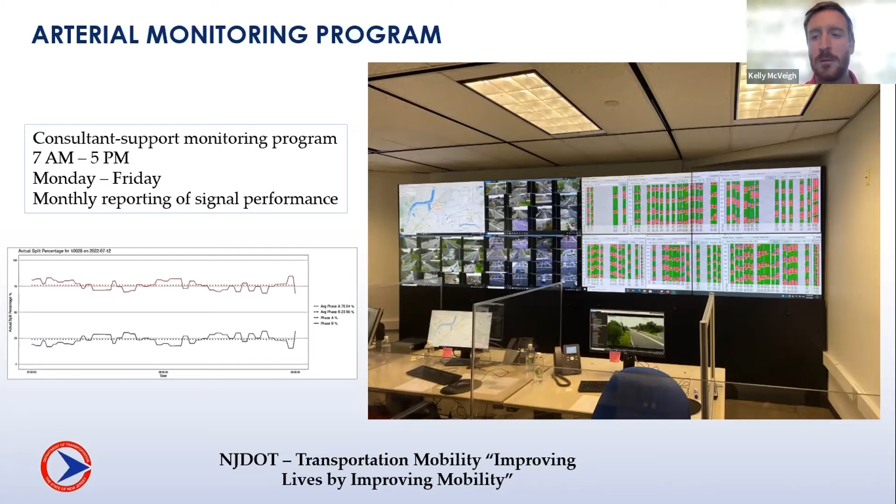So just to give you an idea from a network standpoint, what's the size of our network here? So in New Jersey, there's several corridors that have recently been constructed and are in full operation. We're constructing currently, I think it's 73 signals in construction, and then we've got 118 signals that are in final design. So we are expanding, as I mentioned before, our advanced traffic signal network.

And just to give us some context here, why are we doing this? Well, in New Jersey, traffic fluctuates quite a bit. So having advanced traffic systems, especially adaptive traffic signal systems, plays a key role there. But even more importantly, there's some specific policies and procedures that we have to follow in the state of New Jersey when determining how to update a traffic signal timing, and what kind of data collection, what kind of effort has to go into actually updating timing parameters. And having an adaptive system makes that process much simpler. So we're able to respond to issues much faster.

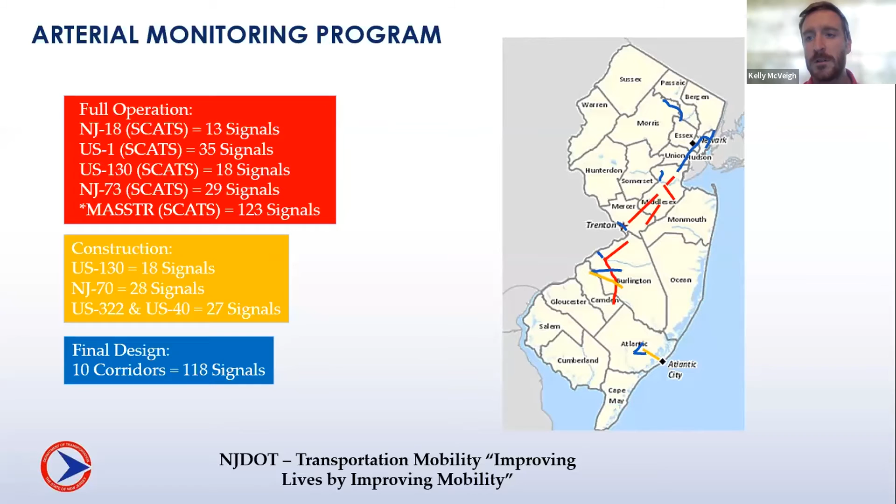So on to some of the data that we use in terms of crowdsourcing data. There's two user interface platforms that I'm going to go over. The first one that we primarily use is something called the SPATEL Tool.

I believe it stands for, if I can remember, Selected Priorities Applied To Evaluated Links. It's something that's developed by the Transcom Coalition for the New Jersey, New York, and Connecticut tri-state area.

So we will use that in terms of real-time monitoring. There's a map interface, much like if you were to log into Google Maps or any other mapping application, and you can see things such as the current speeds. It also provides information like the historical speed, so we can get a good idea of whether this is something normal, or something we need to look at with our cameras or additional data from the traffic signal system. Is our traffic signal suddenly trying to increase its cycle length out of the norm, and why? Oh, there's a lot of congestion here that is not historically there. So it's a useful tool.

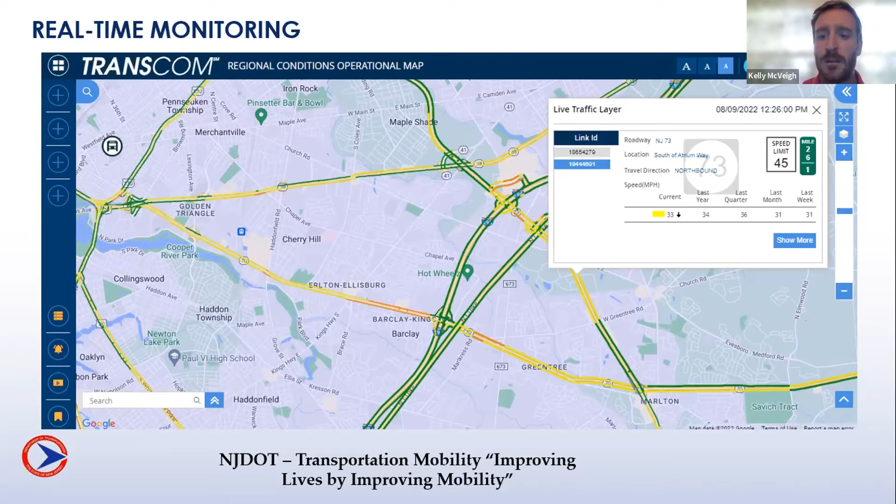It also is interesting because it provides some information on the data source, and I'll get to that in a slide. Here's just another example of the same type of data. It's a dashboard that we'll have, generally on one of the computers in the Arterial Management Center, for our corridors.

This is an example of one of our corridors, Route 18, specifically in the northbound direction. So if there's a priority direction we want to focus on, we can easily set that up. Setting up a dashboard like this, once the data is in the Transcom SPATEL Tool, takes about a minute or so. You just have to select the links you want, maybe 5 minutes if you're looking for the links.

And again, it provides a lot of good quantitative data here. What's the current travel time? Historically, what is it? It gives you the delta—that's what you see in the incident delay column, the difference between calculated travel time and historical travel time. And then you can also see, is it close to free flow travel time? What's being measured around midnight, 1 o'clock, 2 o'clock in the morning, and is that comparable to what we see here currently?

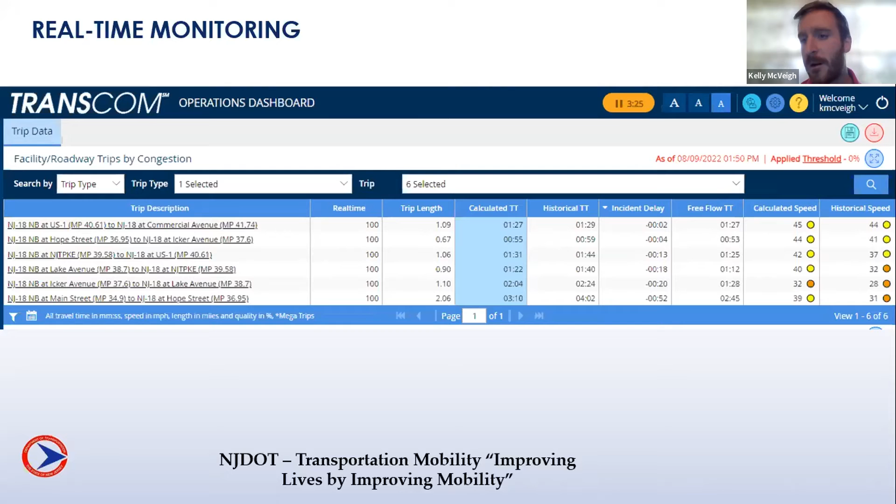As I mentioned, there are several data sources. One of the unique things about the platforms we use, especially the Transcom SPATEL platform, is that an agency subscribed to certain data sources, or that has certain data sources—Transcom will set up an API to connect to the original data source feed.

For example, the TrafficCast Bluetooth data that comes from their travel time re-identification Bluetooth readers—Transcom will actually take that data in. We'll inform them where it is, what roadways, what mileposts, and that becomes an additional layer within their data fusion engine, as they call it.

Really it's like a data layering engine, meaning on one section of roadway a user can see the Bluetooth travel time versus the HERE NAVTEQ—previously NAVTEQ—travel time, INRIX if they have Sensys pucks in the ground, and then Traffic Now data, which is another vendor that provides a product called Deep Blue, which is re-identification Bluetooth reader data.

So there are several data sources that can be used, and a user can actually go and select those sources specifically to see where they are throughout the state. If you look at the map of New Jersey, you'll see little speckles of Bluetooth TrafficCast data versus a fuller coverage of INRIX or NAVTEQ.

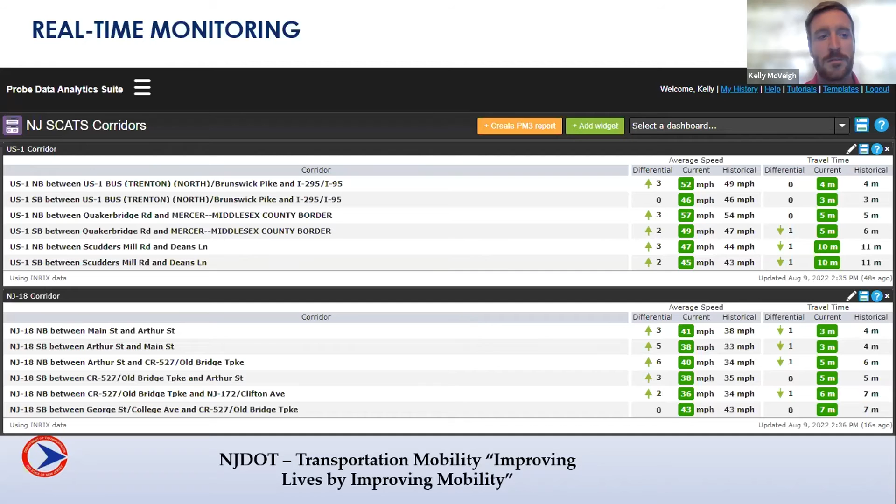Vehicle probe data is great for identifying issues when you're looking at it in real time, especially in a map application, especially when you have access to a layer that tells you the historical data. It's a very useful tool for someone to just look at a map, whether they're a traffic engineer, an operator, or someone in administration who just walks in and says, man, something is going on there. It doesn't look right. It's very intuitive.

So we identify issues. We also, if we get a complaint or something, we can use this data to verify that and make changes to our system. We can respond very quickly, saying, hey, this is going to require more bandwidth for our main line, we need to get a southbound progression pushed right away. We go in and make changes.

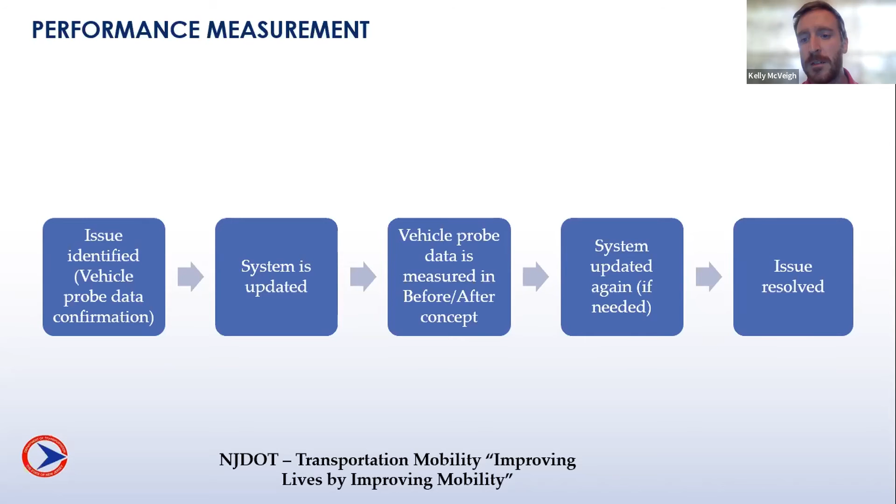Then we'll look at how the vehicle probe data has changed, so we measure it. One of the benefits here is that these platforms keep this vehicle probe data historically, so it's easy to say, okay, we made a change, we know what time we made the change, now let's go back and take a look at what it looked like before. Then we can go back and update the system again if the change we made hasn't had as much of an impact.

So a little bit more about the Probe Data Analytics Suite. We use this more, as I mentioned before. SPATEL is a good operational tool, and we also use that for performance measurement, just to pull some simple travel time graphs and things like that. The Probe Data Analytics Suite has several widgets, and one of them is called a bottleneck ranking tool.

We really like this because you, as the user, can just say, hey, I want to see what the worst bottlenecks are. You can do it by county, multiple counties, by roadway, however you want to select it. We'll go in and do this generally once a month or once every 2 months, and we'll see what our worst bottlenecks are and when they're occurring.

So when we go back into our adaptive system, we can see what parameters we're using, what parameters the adaptive system is selecting based on these various times of day. Then we can start writing certain rules within the adaptive system to say, okay, during PM peak, we're going to go ahead and do XYZ when we measure ABC.

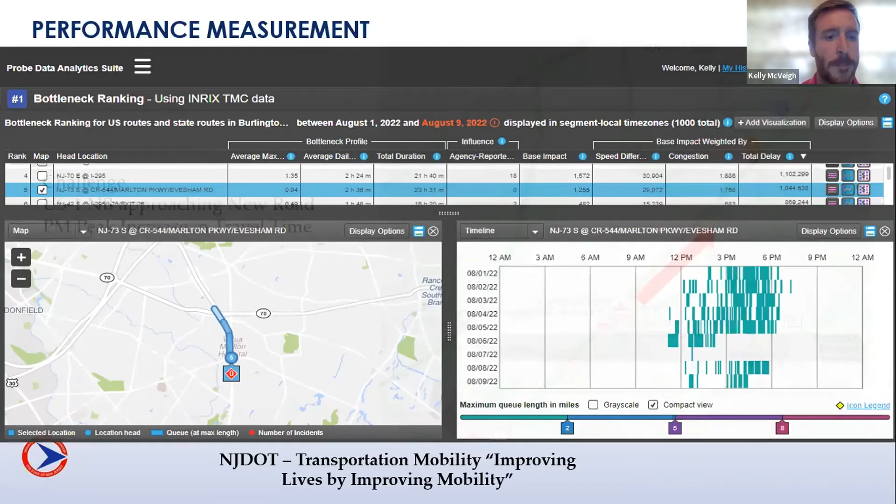Just one quick case study to give you an idea, a little bit more visual on how we use this data. This is a performance measurement example. We had known that there's an issue on Route 1 northbound approaching New Road in South Brunswick Township, which is in Middlesex County. Route 1 is a principal arterial that runs parallel to the New Jersey Turnpike.

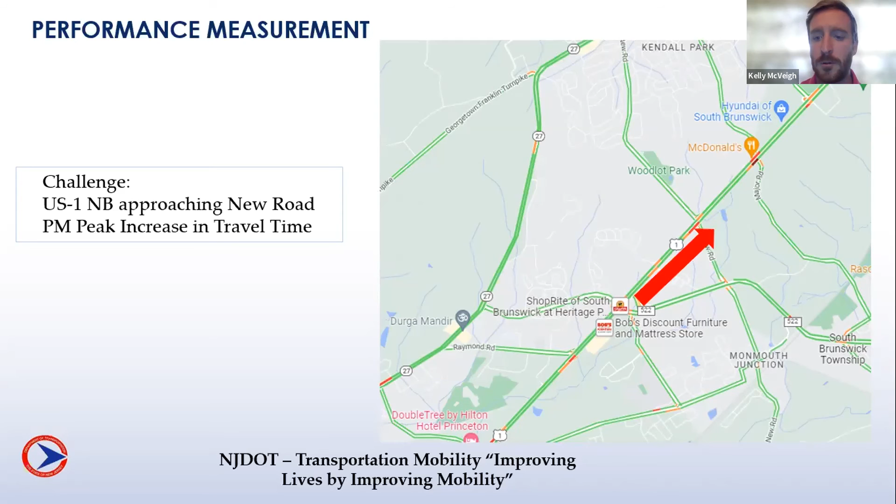We knew during the PM peak in the northbound direction there was some congestion that was building, which we could see via cameras. There are a lot of cameras on Route 1, and the probe data was also helpful in verifying that. So what did we do? We used the Splat tool.

These are snapshots from the Splat tool where we can select the links. When we're very specific in the links that we need to select, the Splat tool is good because it's a little bit more granular than the Probe Data Analytics platform.

What we did was we picked the northbound link, and knowing that we were going to make a change to Route 1 mainline that could have a negative impact to the side street route, we also selected the westbound approach link on the side street, knowing that was the primary direction on the side street in terms of traffic volume.

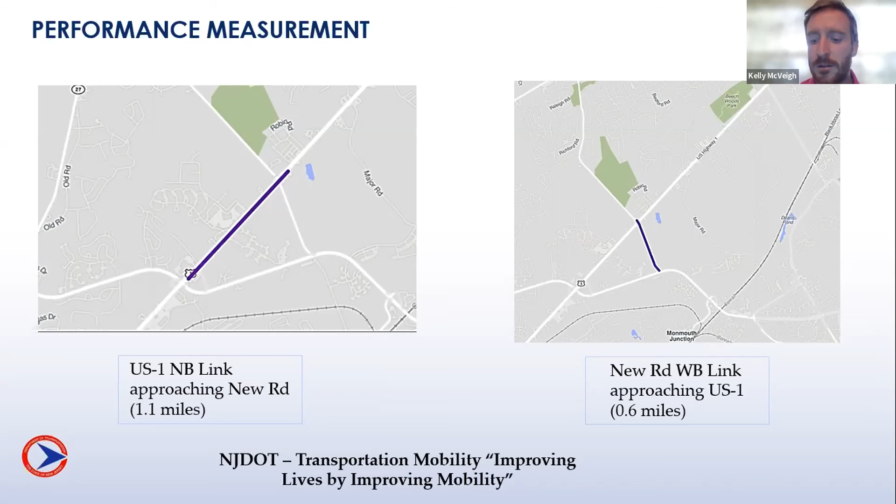Then we looked at the travel time for Thursday. So it was Wednesday, then Thursday, and we did see that on Thursday there seemed to be a bit more of an improvement. We kept our eye on this for a couple more days and saw that it generally had improved, the mainline travel time northbound approaching that intersection on that link. So that was good.

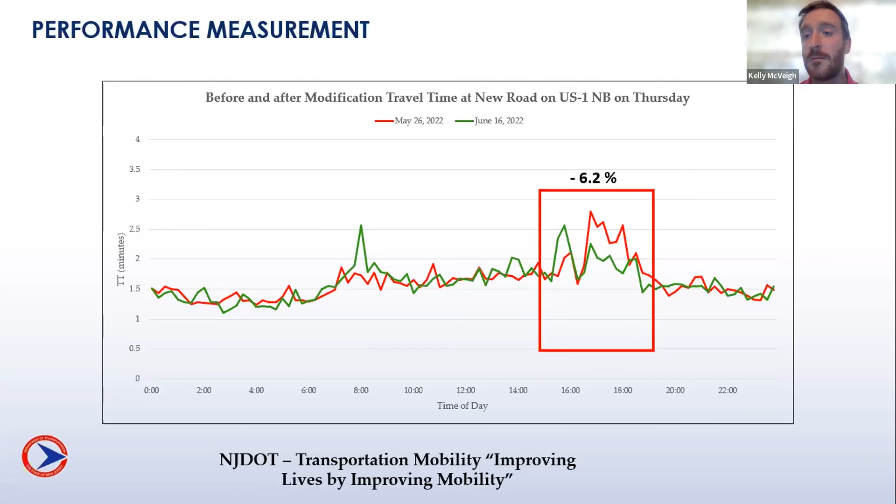Then we did see a little bit of an increase in the travel time when looking at Thursday. So that improvement that we saw on Thursday on Route 1 northbound, you can also see a slight degradation here for the side street approach on Thursday as well.

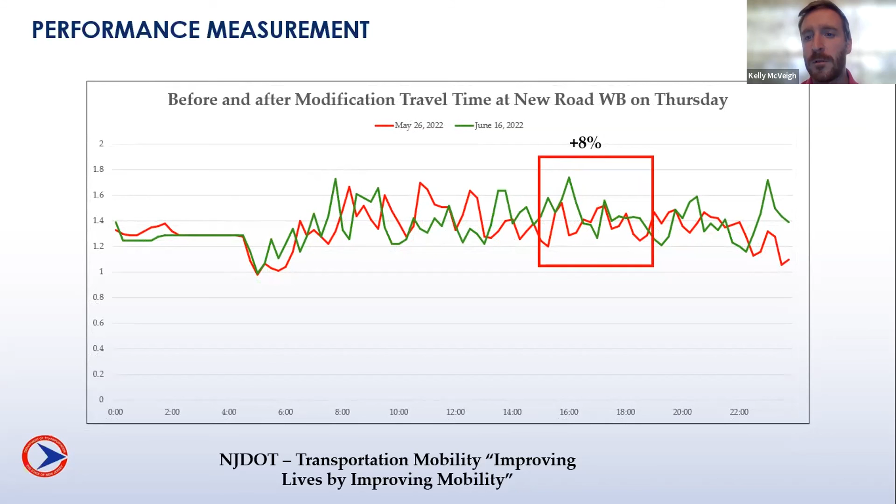The last slide I have here is just some of our next steps. We're really starting to focus on how to automate a lot of this. Currently we have so much data, these platforms automate it in terms of being able to look at it when we want to in a user interface, but finding ways to produce a report that we can show is key. If I had to guess, over the last year I might have about 25 to 30 PowerPoints that explain these various cases where we made changes and saw these improvements.

Quantifying that at a high level for management is an important next step. So we started looking at the ATSPM platform. I really like what I've seen Georgia DOT do with Kimley-Horn in terms of the SIGOPS metrics, used to be called the MARK 1 platform, but now called SIGOPS. And what you'll get to see in a few presentations, Allyson in the Austin area, the platform they have in terms of reporting capabilities is something New Jersey is very interested in. We hope to find more information on how to make that happen.